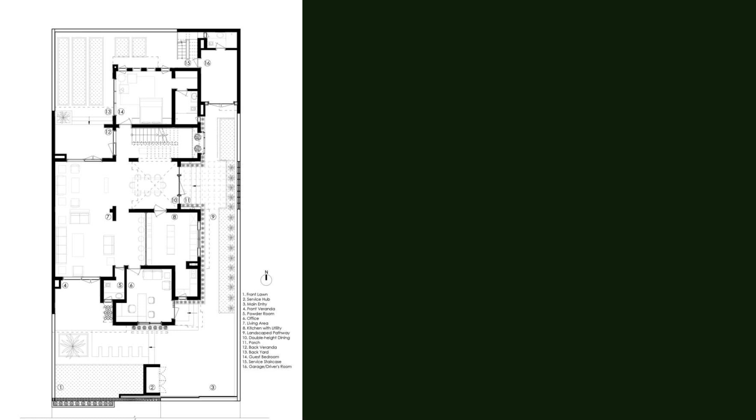Bricks at 47 House by Design Plus in Noida, India.

Any project where an architect receives an open hand is an ideal project. However, as the studio acknowledged during Bricks at 47, it's also an immense responsibility. It helped that we knew the occupants well, personally, and could discuss accurate programmatic solutions during the formation of the brief.

The house is designed for a young nuclear family with 4 permanent residents. Apart from the proverbial bedrooms, the program evolved with 2 studies and several overlapping, yet shared family spaces. Each of these was constantly engaged with the 18-foot-high dining.

Understanding that the couple is known for hosting impromptu gatherings, the public function was taken to the 2nd floor, top floor, instead of impeding into the areas that the family was expected to occupy at any time. This public function was the bar.

While the indoors accommodate a gathering of 18, the adjacent terraces could account for a gala. To assist in hosting the frequent galas, the terraced landscape carried functional elements like the built-in barbecue, a platform for lighting a bonfire, permanent wood-clad furniture, and of course abundant plantation.

Sustainable green home, our shared ethical responsibility. The clients were completely synchronized with the studio's philosophy of being ethically green. The house has received a platinum certification from IGBC Green Homes.

Some important aspects covered are as follows. Site selection and planning: reduced heat island on roofs with adequate insulation and reflective paints. Almost 20% of the ground floor is covered in natural terrain, with the house allowing for universal accessibility.

Water efficiency: rainwater harvesting, efficient plumbing fixtures, using drought-resistant species for plantation. Energy efficiency: the residence falls under the composite climatic zone and attempts an energy cost savings of more than 30% over the baseline. The energy conservation measures include efficient envelope, efficient lighting, efficient air conditioning systems, and solar PVs.

Material and resources: waste segregation and tying into the existing waste management ecosystem of the neighborhood became integral to the additional planning. The project is on track to avoid sending almost 60% of construction waste to landfill. All material procurement is within 400 kilometers of the site.

Most of the shuttering wood is recycled within the house as paneling elements. Indoor quality: enhanced cross-ventilation, enhanced daylit spaces, and low VOC materials ensure a healthy habitable environment. Construction technology: building construction classes at the site.

The project offered the potential to be a playfield for several design and construction techniques. From designing elements using custom-written codes, such as the parametric brick wall and parapets or the double-curved canopies, to relying on century-old methods of spanning distances like the jack arch. The house was a testing bed for high-tech design tech marrying low-tech construction tech.

An AEC pipeline which we believe is India's great strength. The site also helped our principal, Mr. Arun Beej, to organize building construction classes for the studio, especially since some of the elements needed unfortunately dying skills.

Terrazzo flooring, for instance. Once a thriving and economic flooring system has completely gone out of the current preference list. The proportions of chips to cement, water content, laying profile, and temperament were all highlighted via self-demonstration. These classes made us romanticize an era where the architect himself was the master builder.

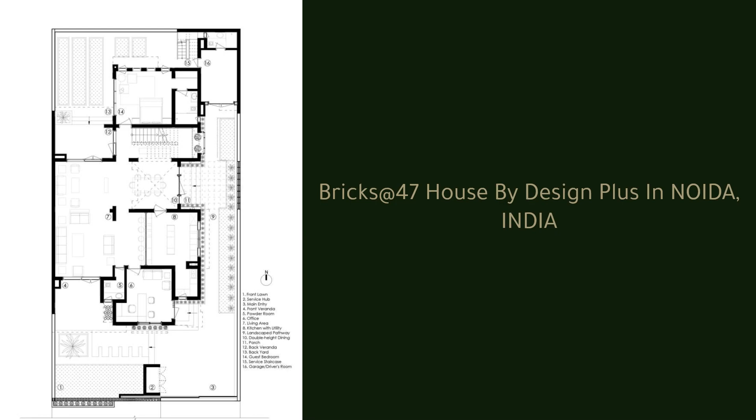An idea that spread sustainable construction methods was the reuse of custom shuttering. Shell roof/flying carpet: 2 rooms of the residence, master bed and the bar, carry a thin concrete shell as the roof. The shuttering for this was FSC-certified yellow cedar wood. Aesthetically, this ensured beautiful grains on the underbelly.

Post-de-shuttering, 100% material was reused in wall panels, false ceilings, and some door frames. Jack arches were employed in 2 lounges on the first floor. Although the dimensions of the lounges were different, a modular shuttering was designed to get more life out of the limited amount of shuttering ply brought to the site.